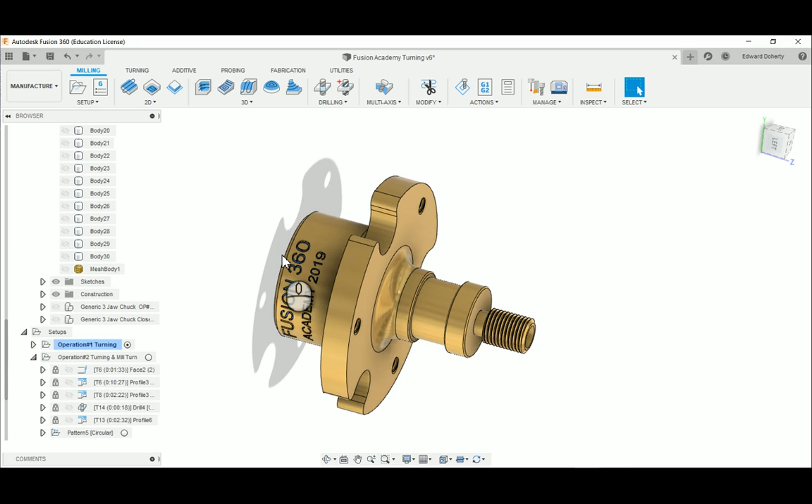Okay, I'm just doing a quick screencast on CNC lathe. This is actually going to be a 4-axis because of the notches. But if you didn't have a 4-axis lathe, you'd have to move this to the mill and do milling from that point of view there, like those 3 holes and these 3 notches.

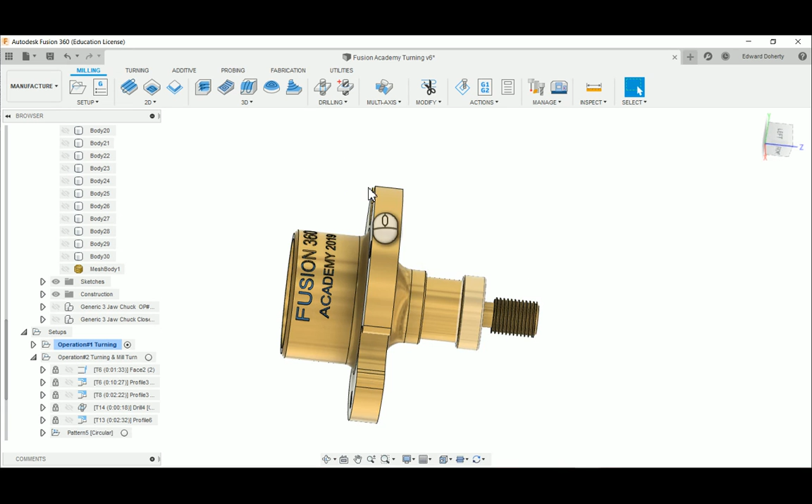So the plan is going to be to machine this side as far as we can go. Then we flip it over and machine this side remaining and the bore and all that. Now if you're in a 4-axis lathe, then you can actually get it to start milling that stuff. So let me put it back to the original orientation here. Name view. There we go.

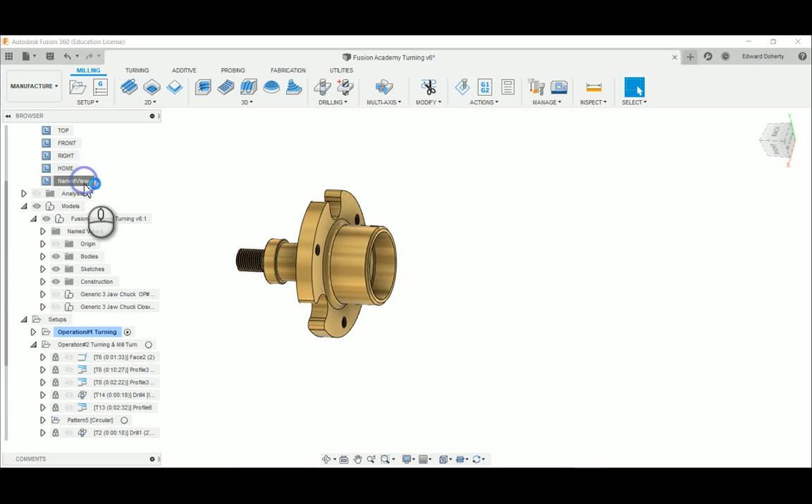Alright. The other thing I'm going to put in is a 3-jaw chuck. Right there. 3-jaw chuck. And material. There's some material there. Alright. Good enough for simulation. I probably would hold it by more than that, but we could probably play around with it. But we can't machine in this area. We've decided we're only going to machine this far.

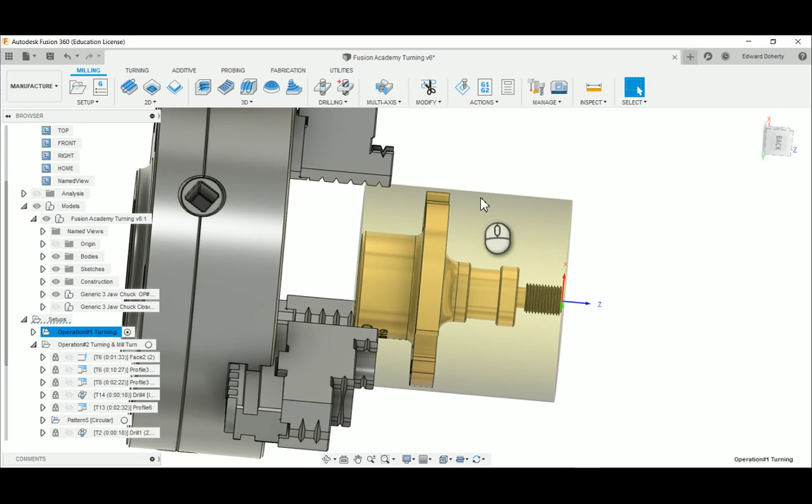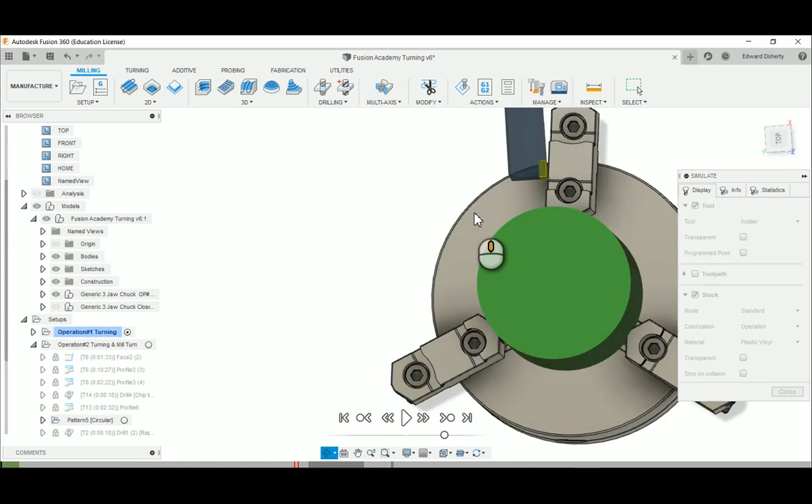Alright, so this one's actually something I got out of CAM samples. So this has already been done. So let's simulate this one. Alright, so there's our stock. Our orientation on CNC lathe would be tools that are upside down and coming from this position. Alright, let's hit play. Machines the front, machines the outside.

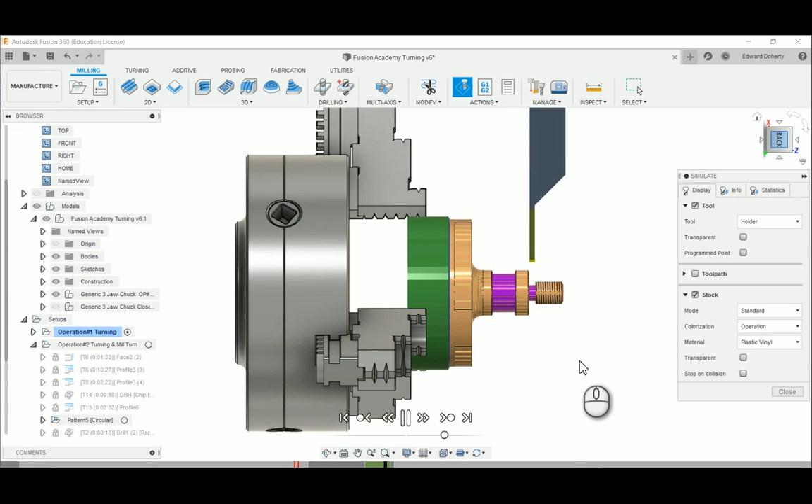You can see those multiple cuts there. You have to switch tools. Yeah, switch tools again. That's a finishing tool. And grooving, a little bit of grooving, and then looks like spot drill and drill. Let me move this out of the way.

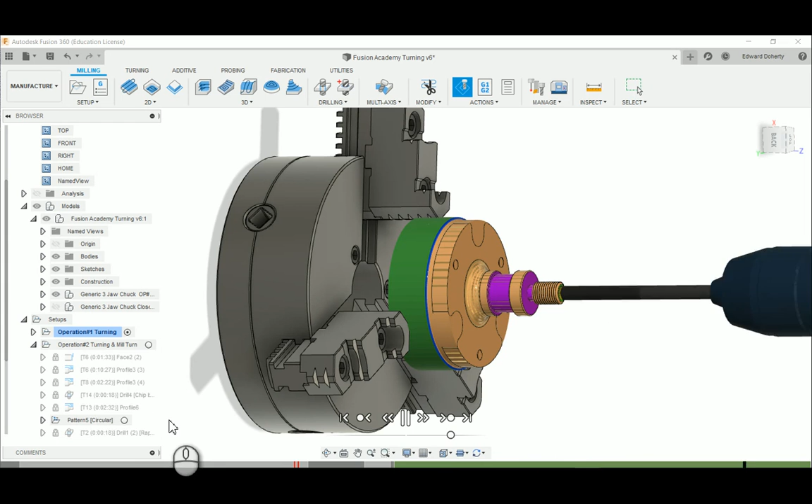And threading, which probably just blew right by it. There's our threading tool right there, a little teeny 60-degree tool doing that thread. Alright, so this is done. Now normally, like when we set up the operation here, we close this out. You're putting in like a relative size cylinder or a fixed size to represent the stock.

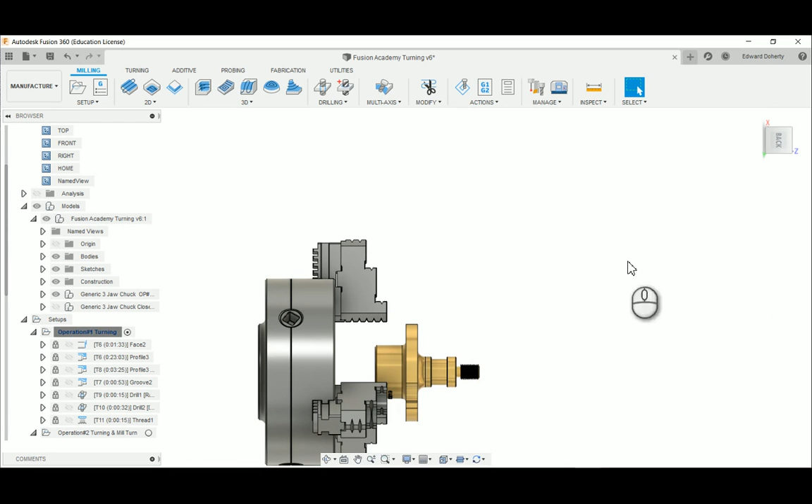Oops, go here. And the setup will be Z this way and X that way. So, in this case, it looked like using the front of the model. And they got a safe zone, stock front. And they got turning on. And the stock is a fixed size and turn this stuff on. And let me go through the other operations.

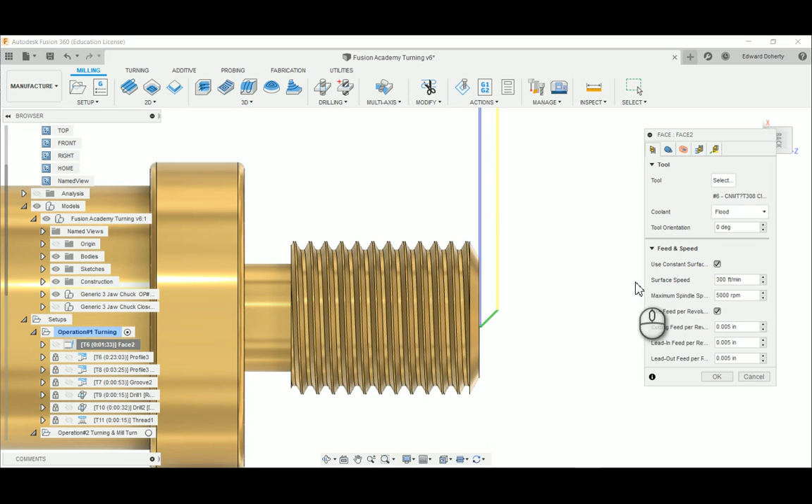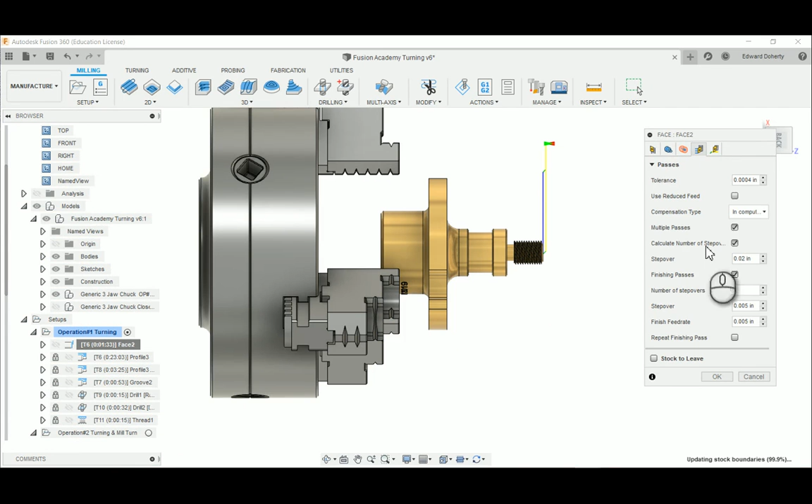So facing is, alright, using a what kind of tool is this now? Not sure, I got too many intermingled tools there. Model front. Yeah, retract clearance moves. Step over in computer. Okay. We have the profiling. This is like the roughing one. You can see all the cuts there.

Actually, I did not program this. I got this from the CAM samples. Actually, I learned a lot by looking at the CAM samples. I think this actually has the older profile up here.

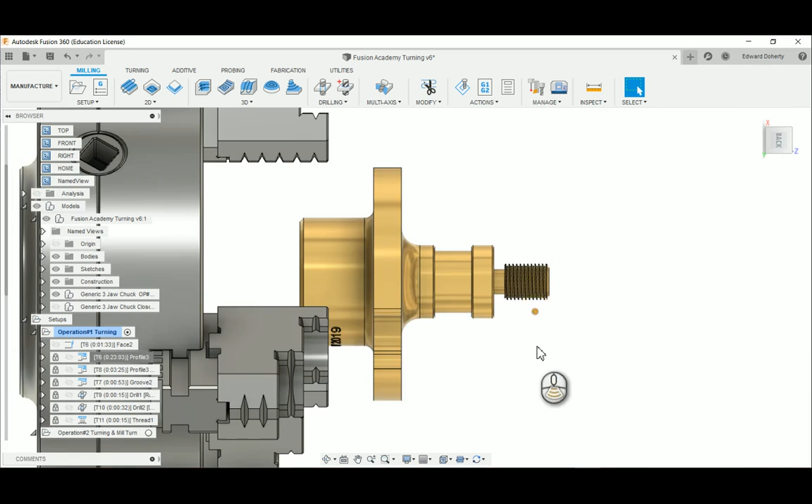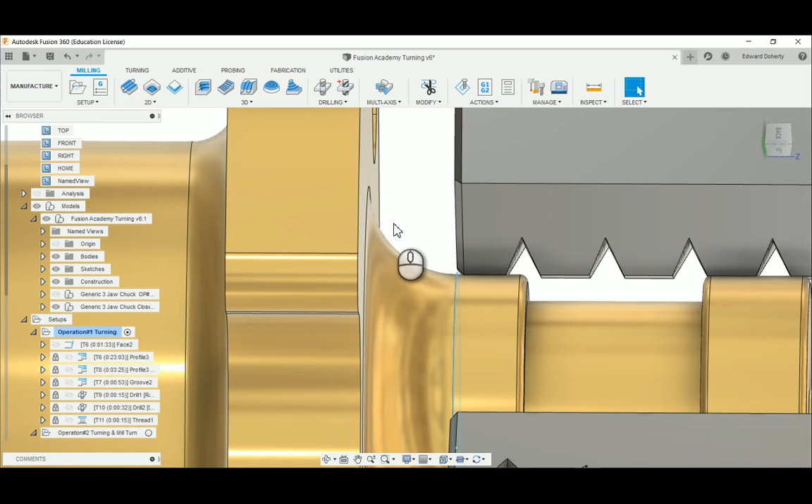Alright, so this was set up to be a dual chuck, like you put a chuck on this side and hold on to that. Alright, we're holding on to this. This is sort of what you have to imagine. This is all finished, except for those slots. So we're going to hold on to this area here, and not in the radius. The radius is not a clamping area. That would be adequate. Or in a collet, that would work.

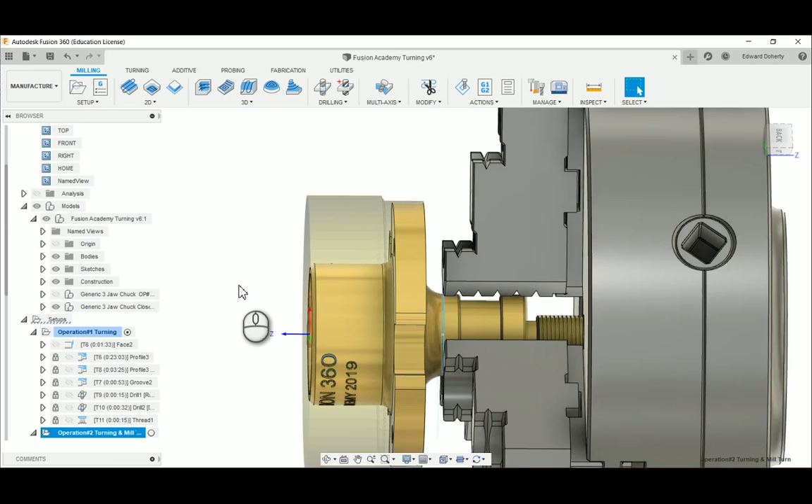And you got to have some way to know exactly where this is, because you have to make everything on this side line up with this side. Alright, so I switched to operation 2. I actually saved what they call a stock model, and I had to import it as an STL file. But let me just turn off the chuck and the body. Alright, so there's our material, even with the drilled hole. I was able to save it.

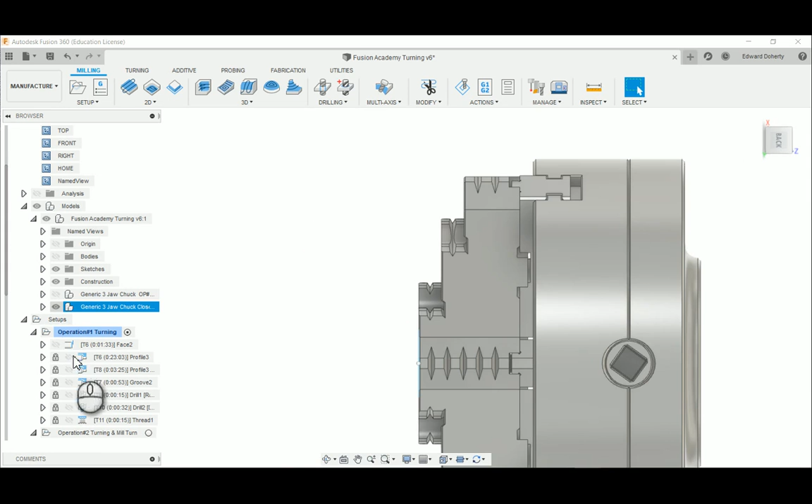And this is actually a better demonstration of operation number 2. So we'll put the chuck back on. And operation is our material. Okay, I'll zoom this out a little bit. I'm sorry, I got the wrong one on there. Operation 2, there we go.

So in this case, let me just flip this around this way. This is sort of like if we had to do it in our lathe, we would have to flip it over and do a new setup, right? So it'd be Z this way, X that way again. Only we need to have some control of where we place this.

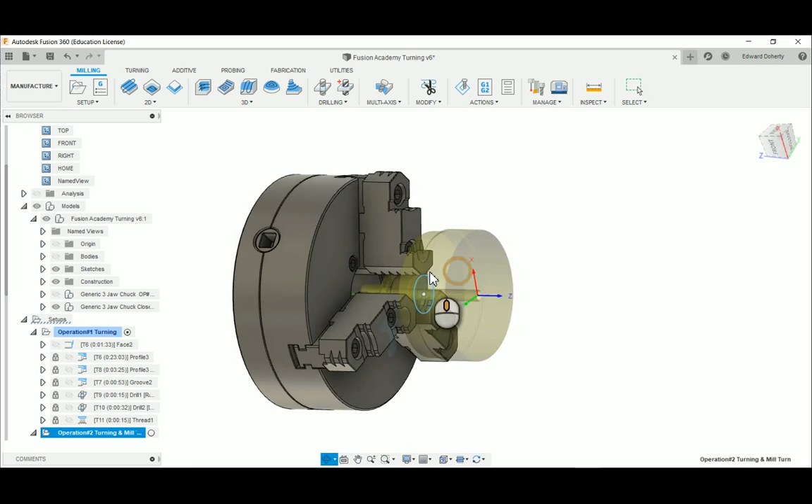So we'd actually use a soft jaw that was cut. I think we could capture it by the outside of this ring right here. That would be the best. Only problem is we can't mill the little slots. So maybe we'd have to make a soft jaw with a counter bore so it stops right here, so you can place them in and they still hold it. This is like a universal jaw, but good enough for demonstration.

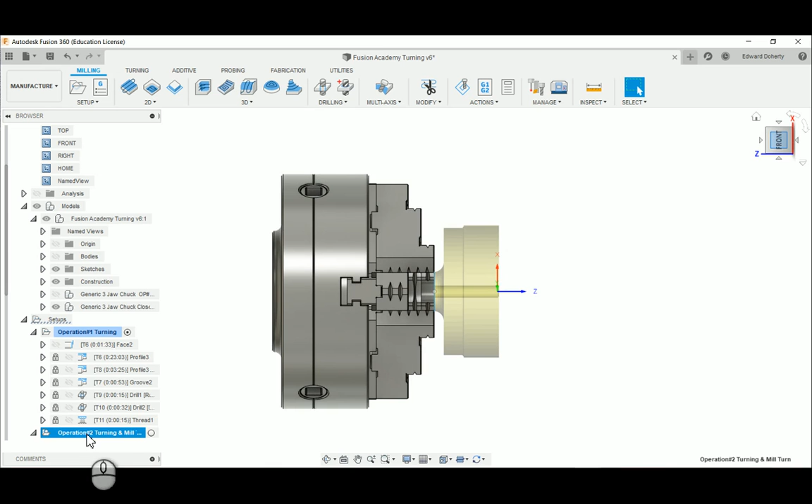Let me put, X is up, that'll be front. Okay, let's see how the simulation will work. Simulate. Alright, here we go. Hit play, right, same thing again. You're going to machine the front. It's not working this time. Remember, this is finished now.

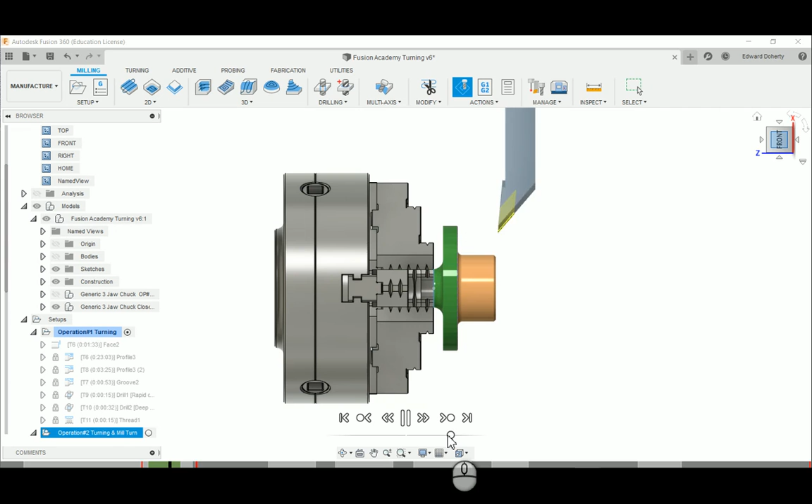You got the rough tool, you got the finish tool, big drill. This is a boring tool. And now, let me stop.

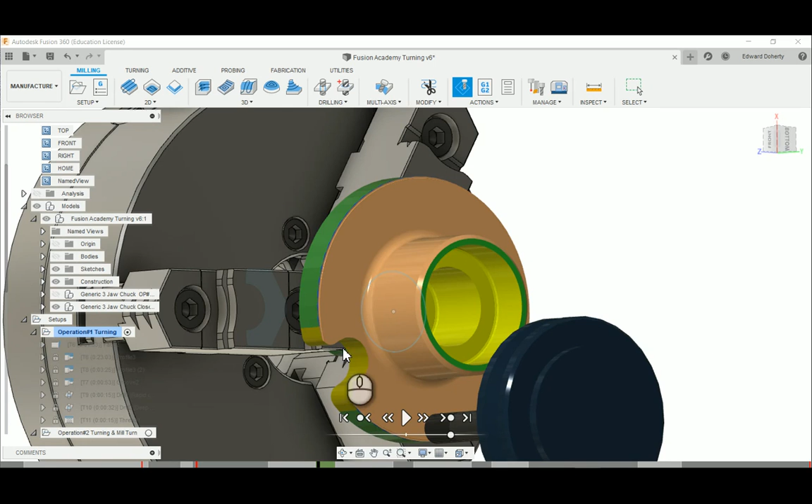This would be, in real simulation, rotating, but at this point it would be stopped. This now becomes an axis. This will become the C axis. C rotates around Z, and this will be the spinning tool. So this is really just like, imagine you're in a milling machine.

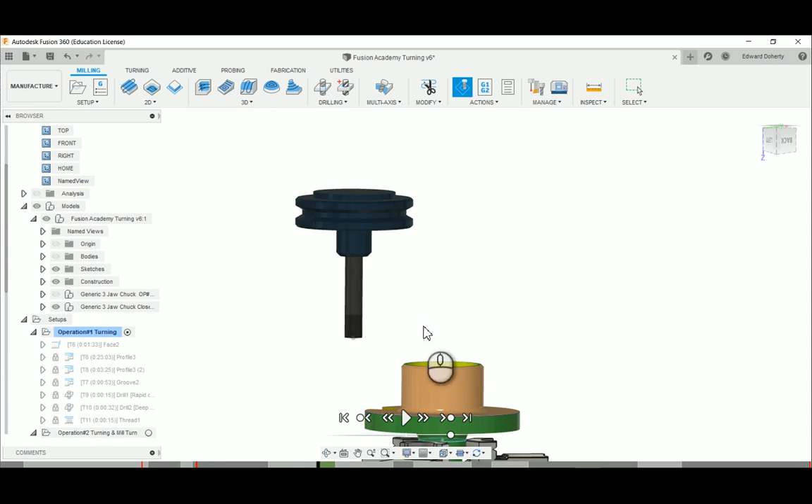Now in our shop, this is how we would have to do it. We'd have to set it up a third time this way. So it's just a round part, orientation would not matter. And we would mill it in this direction. And that's all really a 4-axis lathe is doing. It's just doing the same thing a mill could do, only just oriented different.

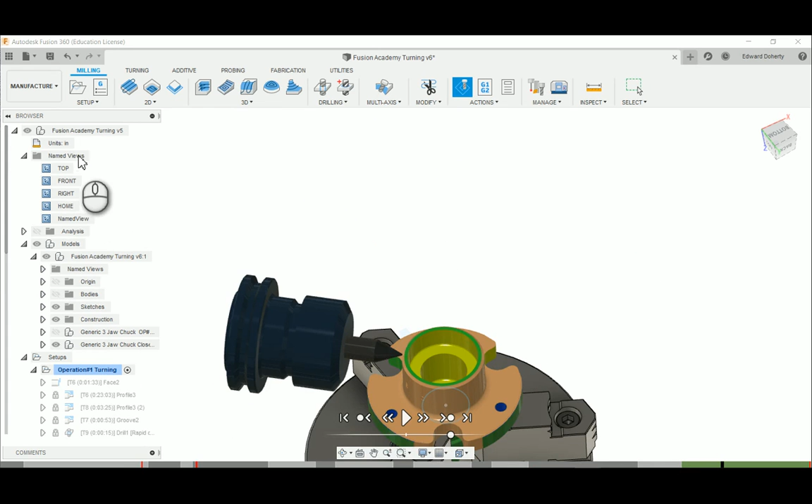Alright, so this actually was set up to do engraving on the side. So let me go back to the... Now this is the orientation, what they call a sub-spindle. So you'd have a chuck on the left and a chuck on the right.

So this is kind of high level. It's like you could do everything without touching anything. You wouldn't even have to flip it over. If you had a 4-axis, actually it becomes more than 4 axis because this also becomes an axis. So it's like, I think it's 6 axis.

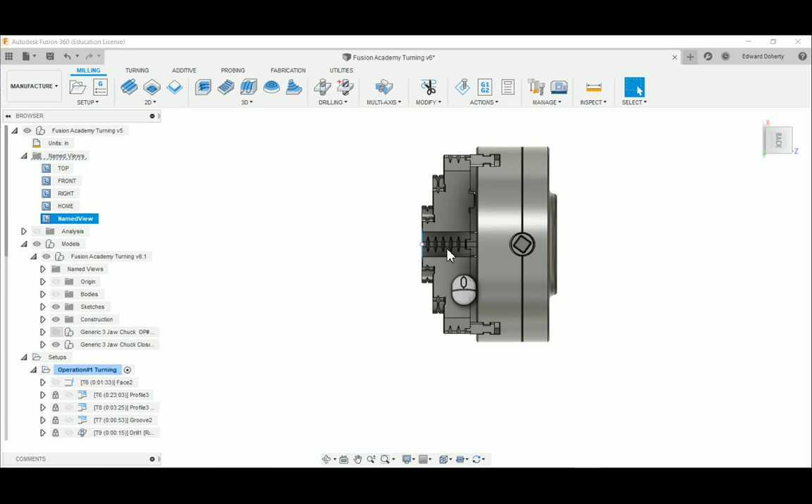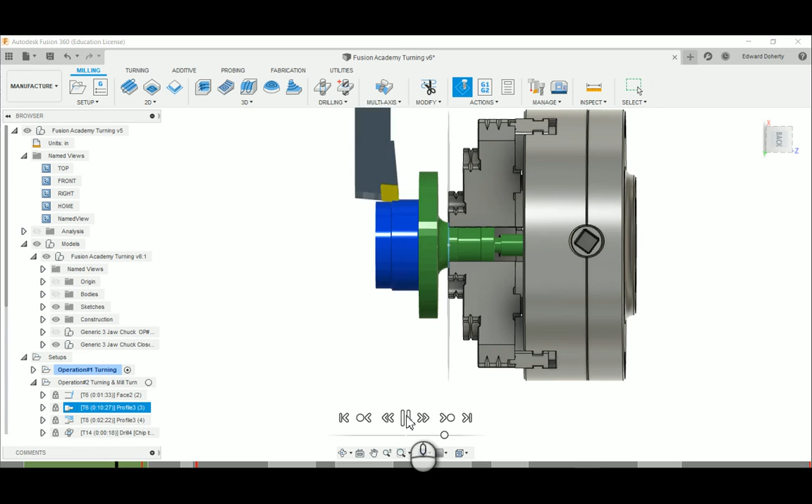Alright, let me turn. Let's see. Operation 2. Okay, I got to replay this one again. Okay, zoom up a little bit. Alright. There's the boring bar in there.

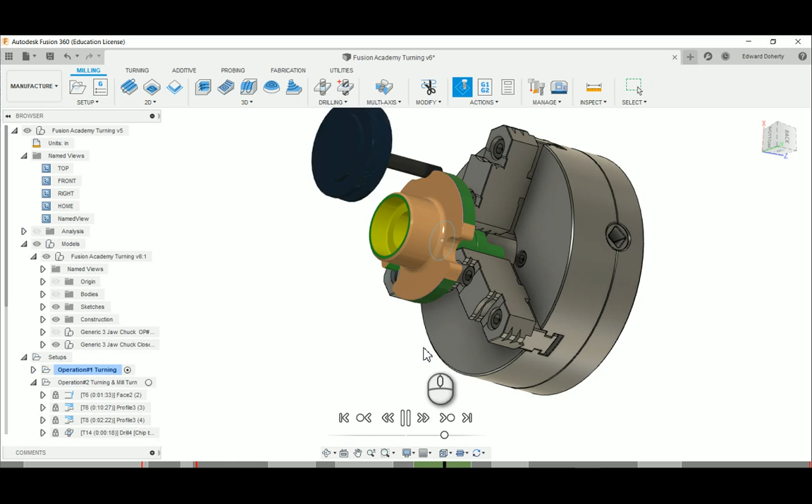We had the pre-drill, now it's milling. An end mill milling the slots. Spot drill, make sure you get enough clearance there. You don't want this to hit that. This looks like a tap, tap, tap, tap.

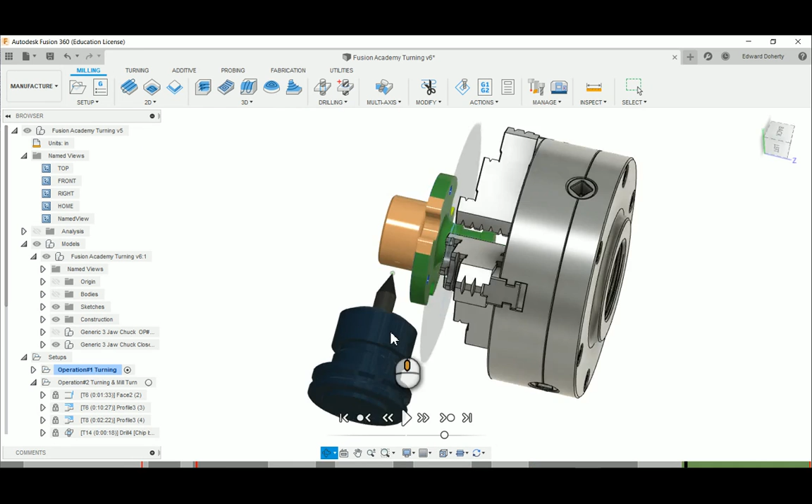And now it becomes a... in the VF2 we could set this up as a 4th axis part and do 4th axis engraving. So actually what happens is this would be rotating back and forth. But in CAM simulation, that's what it's really doing. Alright, so that's a little engraving tool there. And if you look here, it did this engraving.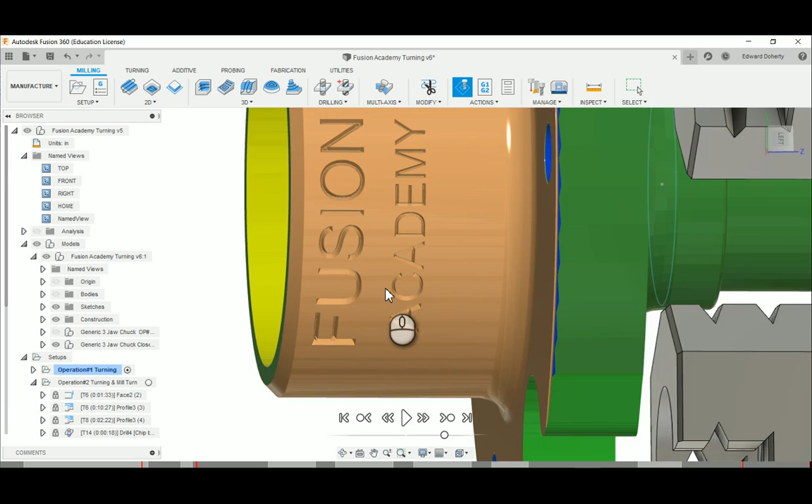So when you're getting into this multi-axis world, it's not really any more difficult. I mean, it's a lot of stuff going on. You got the left-hand chuck, and then if you add left-hand chuck with milling, alright, so now you got milling and turning.

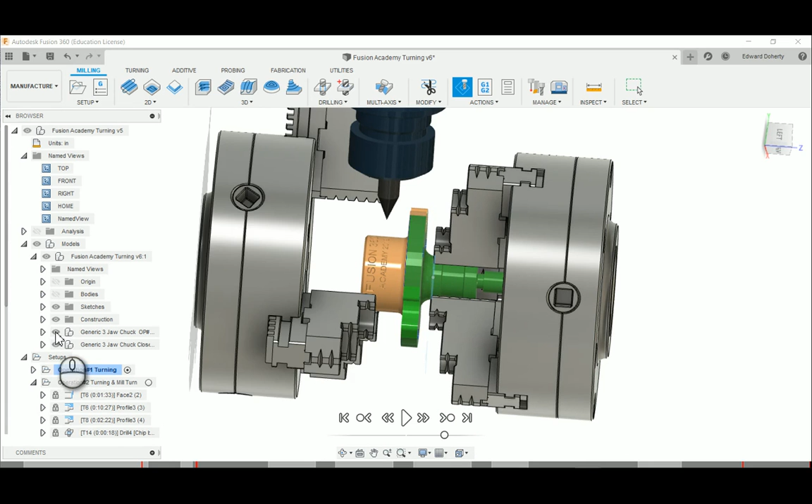Then if you have the sub-spindle this side, what happens is this slides over and grabs that. So that'll be controlled as far as where it is. And then you machine this side, do lathe work on this side, turn it into a mill, and then turn it into a simultaneous axis.

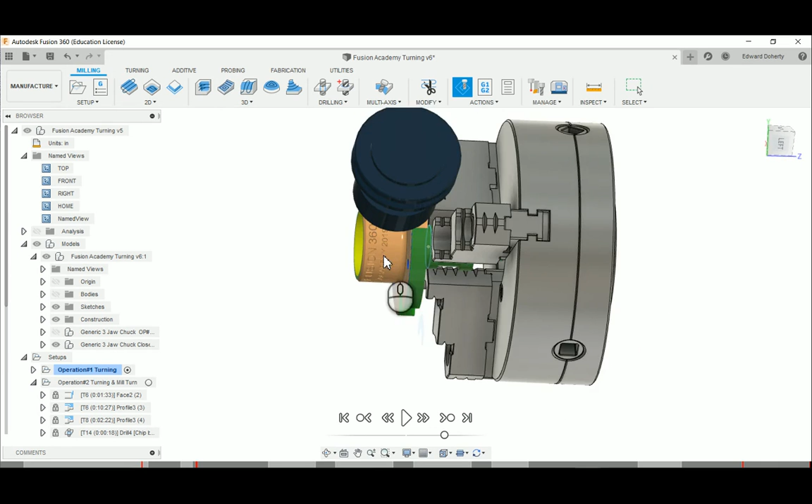This is the spinning tool, and to engrave this would have to go. Let's see. In a mill, this would be the Z direction. This is X in the lathe, and Z would be this way, and this would be, I don't know if they call it C2, or the sub spindle would be rotating like this. So every time it comes up, it'll be coming up in X, not Z.

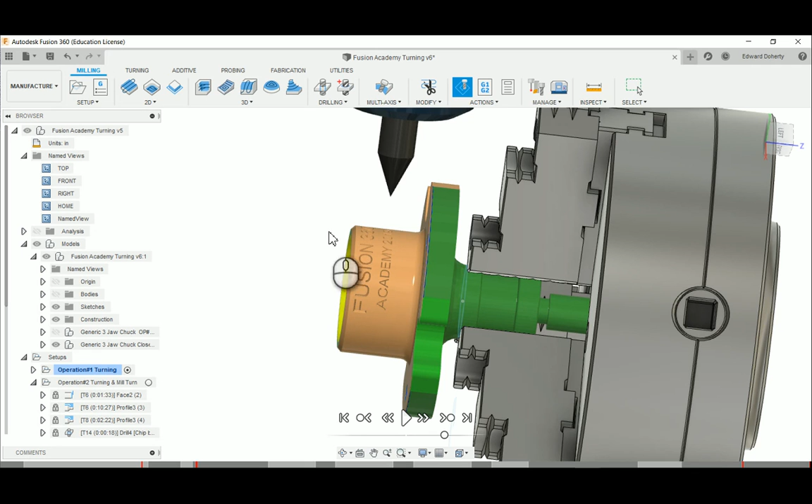So just different orientations. So I thought I'd give you a quick little, I thought this is pretty good simulation of how to do that. But if you're learning all your basics, you're just applying all your basics to this situation.

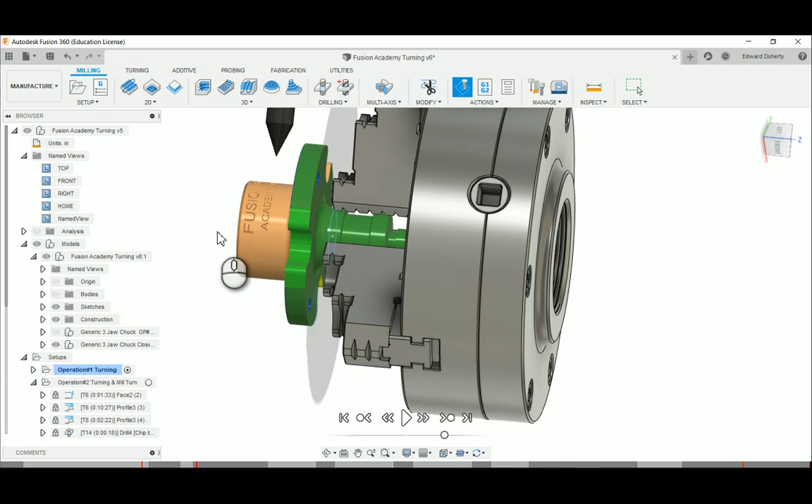But if you just even see this operation 2, how are you going to hold it? It's the same problem you have on milling. You got to be able to hold the part after the first operation. Okay, so I'm going to end this one and go to bed.